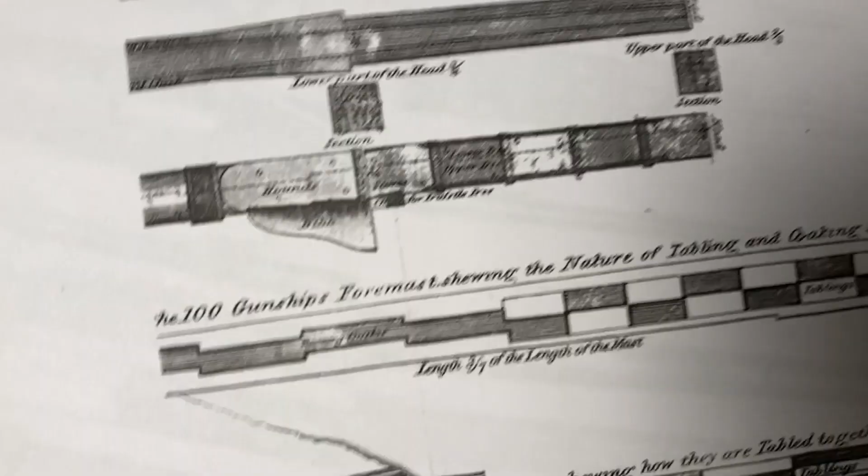right here. There's a set of plans in here that gives you basically for a 36 gun frigate, for a 100 gunner, and for a 74 gunner. And this one is for a 100 gunner. And the United States was very close to 100 guns. She should carry about 90. And so she was a little bigger than a 74 and a little smaller than a 100 gun, like the Victory.

So I'm going to use this distance here, which I can use on here to come up with distance. It's around 2 inches. So it goes from here to here. This distance is basically at the top of the cap, right there. That's the doubling, goes to the top of the cap as far as I know.

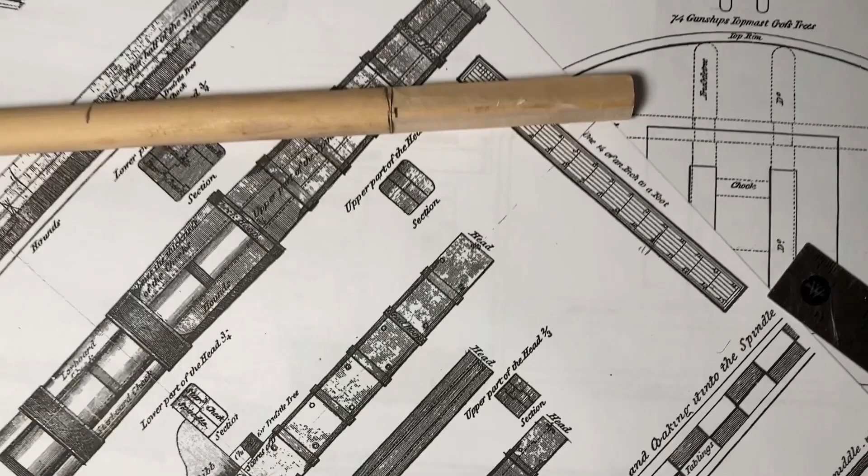And so I'll be forming this. It's kind of squared off now, roughly just carved it. And I'll show you when it's finished what it looks like. I'll just basically take a file, and it has to be tapered just a little bit, as you can see, from here up to here.

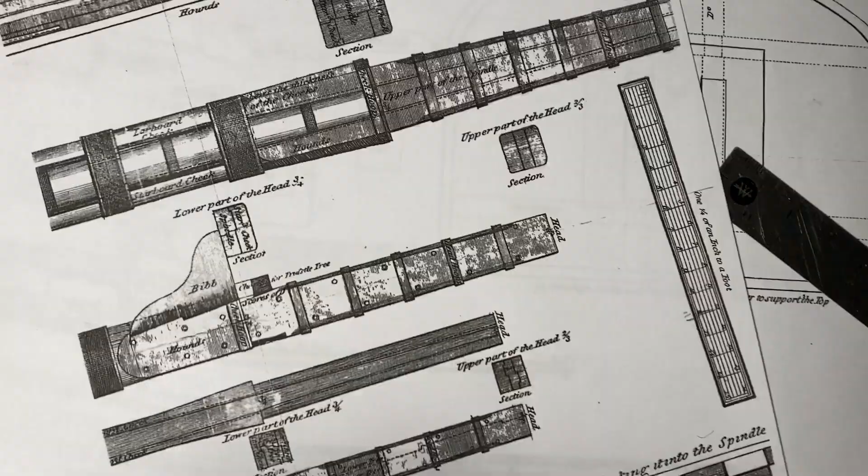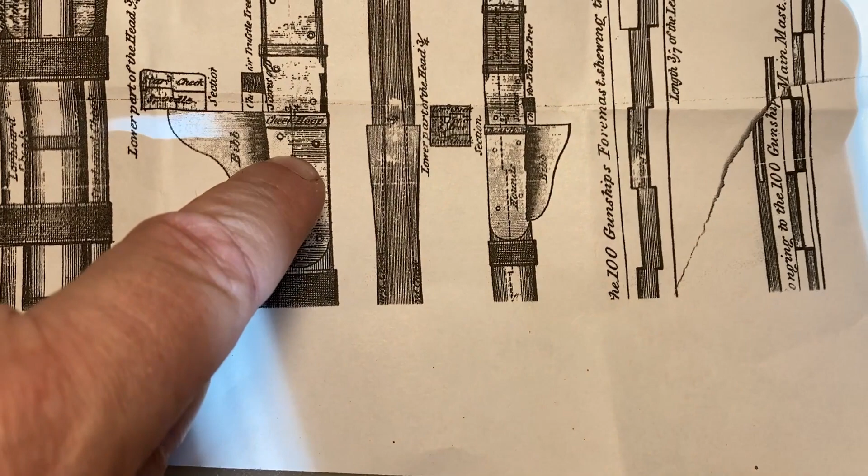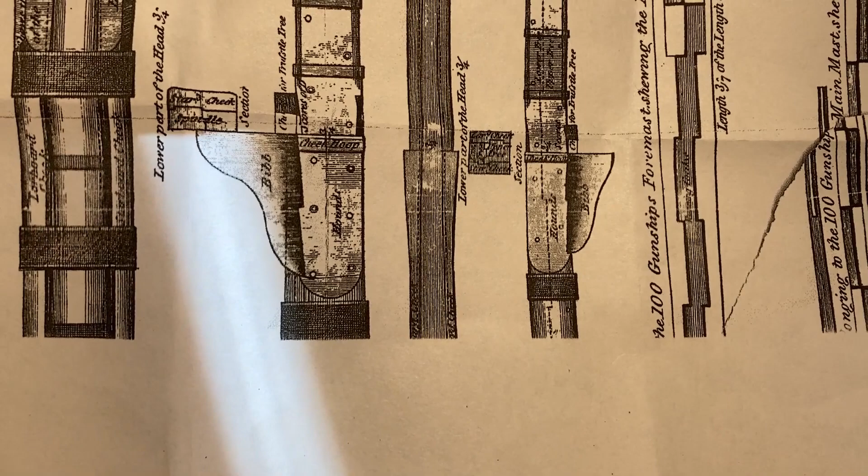Well, at this point, I'm going to cut out those two bibs here and here, or cheeks. Actually, the front is called a bib, and the rear is called the cheeks. On the real ship, they're two separate parts, as you can see, but for the purposes of making a model, I combined the two. Here you can see they're cut out. Here, I'll transfer them to the proper stock, and once the masts are finished to the point where these need to be installed, I will be showing that.

You can notice that only the foremast and the mizzen are done here. The reason for that is I don't have the dowel that I need to make my mainmast.

And I'm not going to go downtown to get that until I have enough stuff in that area that I need to make the trip from where I live to downtown worth it. This is about a half hour, 40 minutes drive from where I live to downtown Tucson, Arizona.

So I'll only be showing these two masts this video. Shouldn't need to do the main mast. It's basically the same exact thing. You can see I have the hounds and the bib on, combination of the two there. And I'm starting to put the cheeks on, as you see there. They need to be shaped at the bottom.

And the rubbing strake for the yard. I believe that's what that is. And then I need another cheek on this side. And the next portion of this video will be showing how I shape the planks, if you will, to fit it in nice and tight.